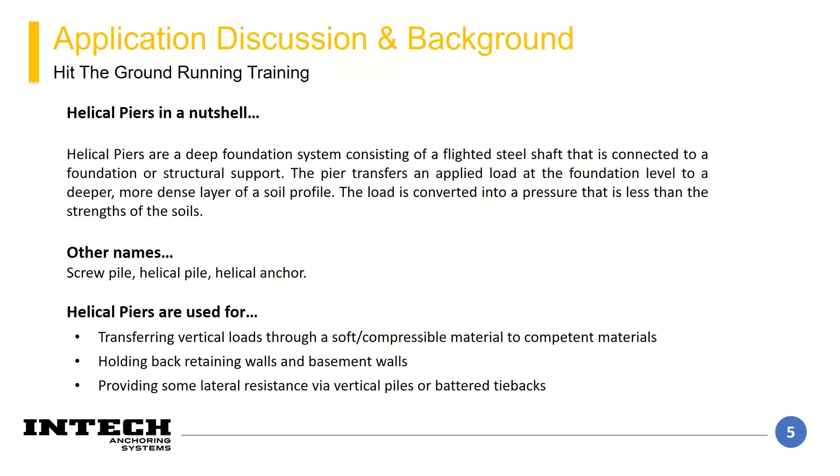You can do that with vertical piles. We have round shafts that have the section to resist that lateral load and flexural moment, or you can do a combination of vertical and battered tiebacks to try and create a static pile cap condition where those vertical piles won't ever really see the load because they'll never strain enough. So it's important to have an understanding of all that when you're doing the full structure design and understand how it's going to react.

So every helical pile has, at a minimum, at least one bearing plate or flight, a central shaft, and a termination. That bearing flight takes that load and transfers it into a wider area to decrease the contact pressure with the soil.

There are multiple options for a lead section, which I'll get into in a moment, but the section that has the flights - if you have more flights, you'll decrease that contact pressure even more. That's the balancing point we're trying to achieve for geotechnical capacity: distribute that load wide enough that the soils at that point won't fail in a geotechnical bearing capacity failure.

That plate area also has an effect on the installation torque. The more plates you have, the more it's going to drag on the soils and the more torque you're going to generate. So there's also a balancing point of being able to twist everything through the soils.

Then there's the central shaft. We have multiple shaft options, and you usually choose those based on your load and soil conditions. That shaft option transfers the loads axially into the plates at depth, and it also needs to be sized to resist the torque during installation. I'll get into that a little more in the design phase.

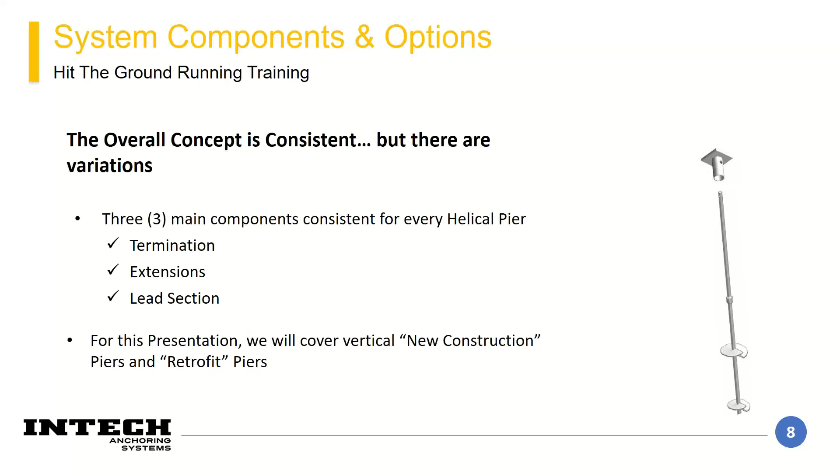So similar as before, there are three main things we call out for every helical pier: we call out the termination, we call out the extensions, and we call out the lead section. I'm going to cover both new construction and retrofit in this presentation.

Broken out here, you can see the termination is at the top. This one shows a new construction cap, which is just a tube with the plate welded on top. It should be sized such that it can withstand the load transfer from the pile cap into the shaft without buckling failures near the top, and also have enough flexural rigidity and area to not overstress the pile cap.

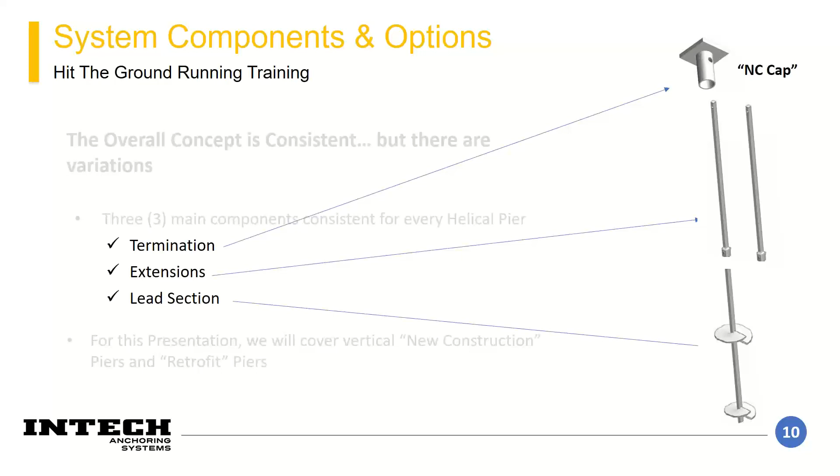The extension sections are just unflighted portions of the bar. Usually these are 3 foot, 5 foot, or 7 foot sections, and they're used to extend your pile deeper as you install, since it's a top-down installation method. The bottom represents the lead section, which is the bar section that has the flights on it, and they come in different flavors as well.

At the top, this is a typical retrofit bracket or underpinning bracket that you could connect to an existing structure. I'll get into the installation and what that really entails, but basically you're installing this up to the wall of an existing building. You try to get this bracket as close to the load as you can to reduce the amount of eccentricity.

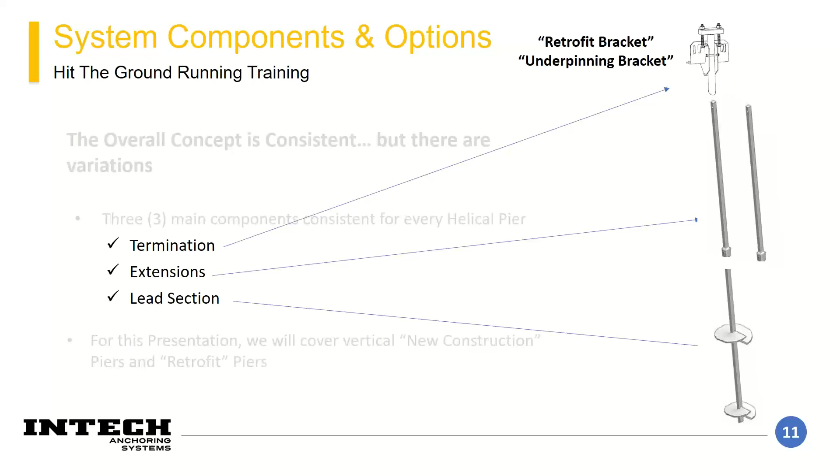A lot of times we'll see people initially have their spread footing, and they'll try to put this underpinning bracket on the extent of the edge of that spread footing. But depending on the rigidity of that spread footing, it might not be able to span the load from this column out to the edge of the spread footing. So typically what we recommend is break the footing up to where the load is and try to get this underpinning bracket as close to the load as possible.

So I'm going to go into the lead sections in more detail now. The lead section is the first flighted section of the pier. This is the section that you start installing with. Lead sections are named for their flighted configuration.

There will be a bar name, and then it'll be some type of 3 number, 2 number, even 4 or 5 number designation. What that designation indicates is the diameter size of the plates on the lead section. So if somebody says an 8-10-12, that means there's an 8-inch plate followed by a 10-inch plate followed by a 12-inch plate.

And those plates are spaced such that the stress bulbs implied by those plates won't overlap each other. So you don't have to worry about multiple modes of potential failure between the two, because those bulbs are going to be at most 2B below the plates.

We have common lead sections, and then we have lead sections that are maybe a little less common. So it can be important, if you have a project where you're going to specify or design something, to check with Bill or whomever you're interacting with on a project to just ask if this lead section is a common one. Because sometimes in the product catalogs there are things that are uncommon, people don't buy them, and there are long lead times. That's one of the places where we can help - establishing a lead section that makes sense on a project early on so there are no hiccups come installation time. That's a benefit we can provide.

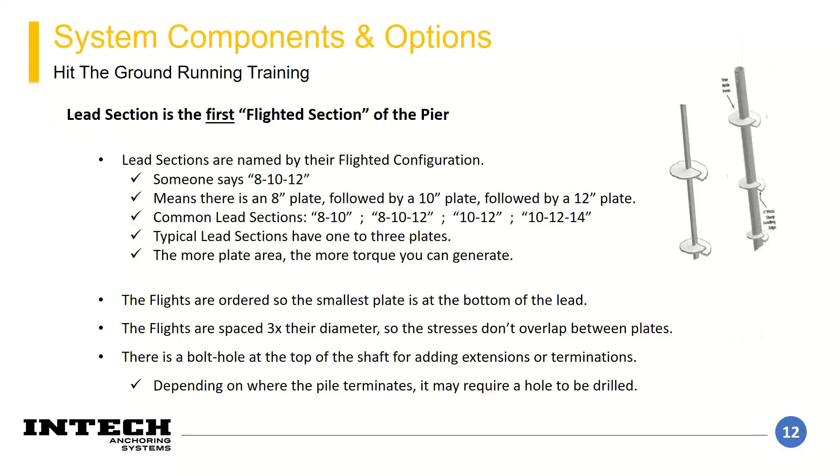We typically have 3 to 4 foot section extensions that have 1 to 2 14-inch diameter plates. You typically want about 5 or 6 at the max for the total flights you add to a vertical pier. So you might start out with an 8, 10, 12, and then have a 14, 14 on your pile. So your full pile length will have 8, 10, 12, 14, 14. That increase in area decreases your contact pressure and allows you to be in a softer soil than you originally planned for.

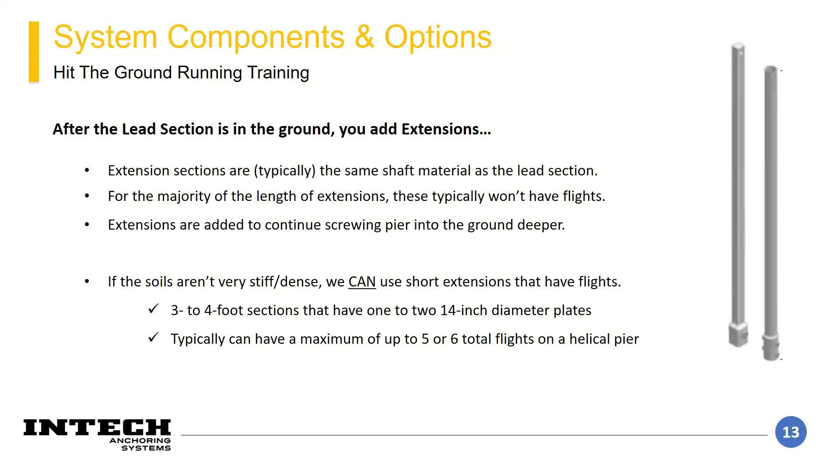So after the lead section is in the ground, we added extensions. Like I said before, typical extensions as well as lead sections are 3 foot, 5 foot, 7 foot, or even 10 foot long. You can get longer extensions, and they're more efficient to install most of the time, but they can get really heavy, and at a certain point you won't be able to handle them by hand, and you'd have to rent or have some sort of material handling equipment. So there's some balancing point between using more smaller piles versus fewer larger piles.

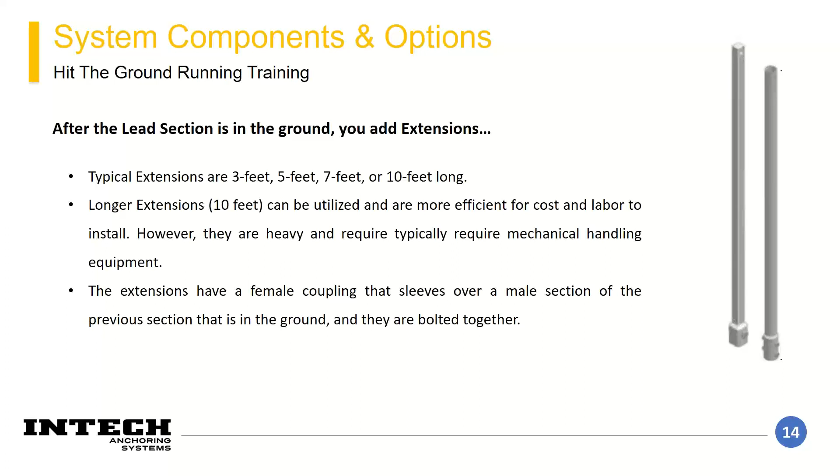The extensions have a female coupling that sleeves over the male section of the lead section or the previous extension section that's in the ground. So basically, screw the pile all the way into the ground, and you've got a little male end sticking up out of the ground. You take your next extension and put the female end onto the male end, bolt them together, and continue screwing your pile into the ground. I think it'll make sense once we get to the visual demonstration of the installation.

So, new construction termination, I went into it a little bit before. The plates are just plates with a welded pipe sleeve that go on the last extension, cut off at the right height. So you just cut off your pile and sleeve this on, and if there's an uplift or tension portion of the pile, you put a bolt through the hole, and that bolt goes through the shaft of the pile.

They're sized based on the flexural strength required for the loads and the pile cap so that it doesn't overstress the pile cap. Once the pile has achieved enough torque depth, these are placed on top of the remaining pile shaft and bolted in, and then everything gets entombed in the concrete of the pile cap.

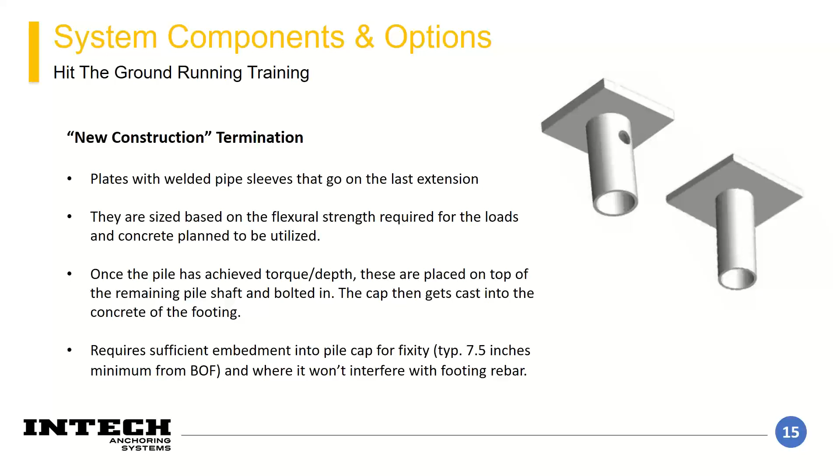One of the things that can come up is how much embedment do you need? Chance typically states that they want sufficient embedment for fixity, and that is typically 7.5 inches minimum from the bottom of footing, as stated in the design manual. If it needs to be less than that, we can design it as a pinned condition, and it'll reduce some of the capacities stated in the manual, but we can definitely help out with that.

So then retrofit termination, this is just one of two of the styles that are offered. We have a few others, and basically this termination is trying to marry up the pile system with an existing structure. Like I alluded to before, the foundation gets chipped away up to the stem wall or up to the column, and that L-shaped seat goes under the stem wall of the footing to reduce eccentricity.

And then there's a slight amount of, quote unquote, lifting pressure to engage the pile with the soils at depth. It's not really a lifting — for the majority of piles, you're not lifting, you're just lifting enough to create enough strain to engage the loads.

There are different styles, as I said in the design manual, that are more beneficial to use in certain scenarios than others. If you have a specific project need, we can help you with that.

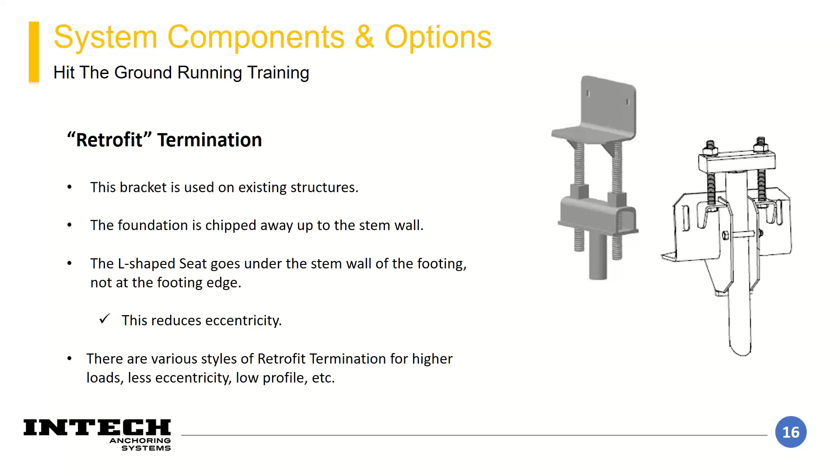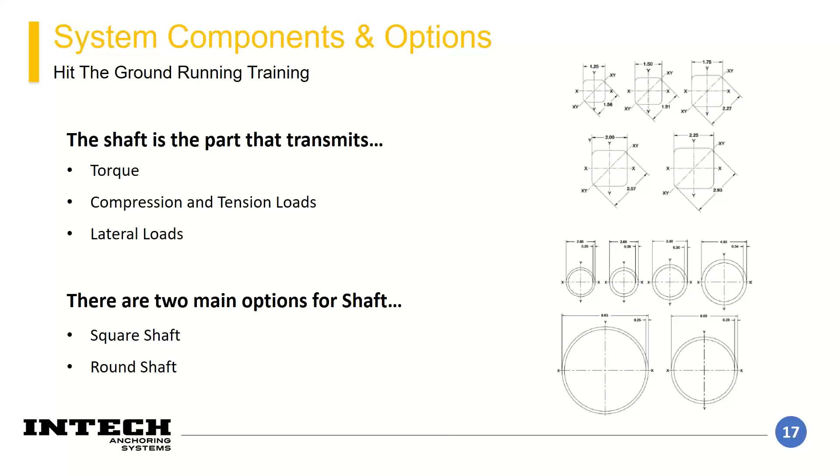The shaft is the part that transmits both the torque and the loads throughout the design life of the project. We have basically two main options for shaft: the square shaft and the round shaft. The square shaft is probably our most common and most efficient pile per load.

It is great for transmitting loads through stiff to medium dense materials, and it has great penetration. Sometimes though, you have to worry about things like lateral loads, or having a relatively thick layer of softer soils can create a buckling concern, as defined in the chance manual, with blow counts less than 4 for over 5 feet generally as a rule of thumb.

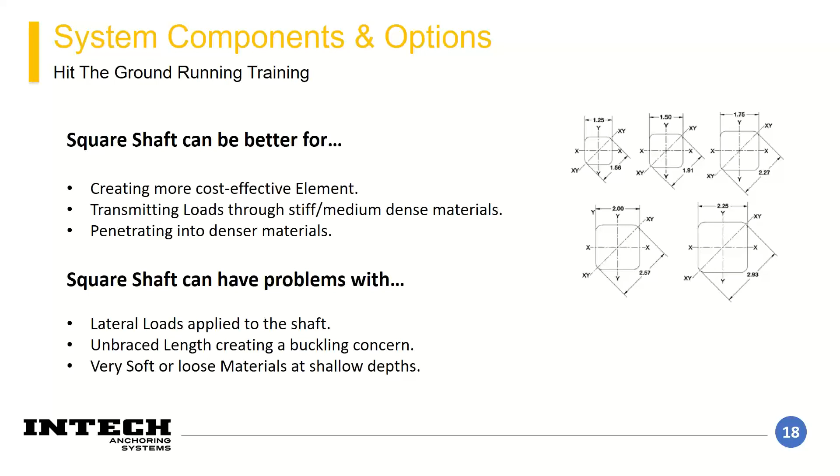When you have these scenarios, you might have to switch to an alternative. But if you don't, square shaft should typically be your first choice as the most efficient type of pile. The naming convention for square shaft breaks down as a 2-letter designation, SS for square shaft, followed by 1 to 3 numbers representing the square dimension.

The weird one is SS5 versus SS150. Both are 1.5 inches by 1.5 inches. The only difference is it's a different grade of steel for the SS150, so it's able to handle a bit more torque and a bit more vertical load. The SS5 is a little weaker and the SS150 is a little stronger.

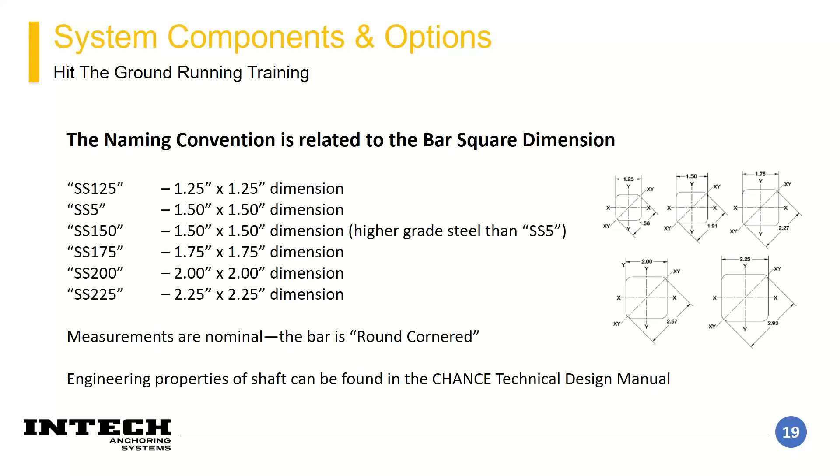All of the ratings are here, so you have your torque ratings as well as your uplift and compression capacity limits on the right side. Those are the ultimate capacities of the bar. I'll get into the torque rating calculations in a bit, but basically all of these have a K sub T of 10.

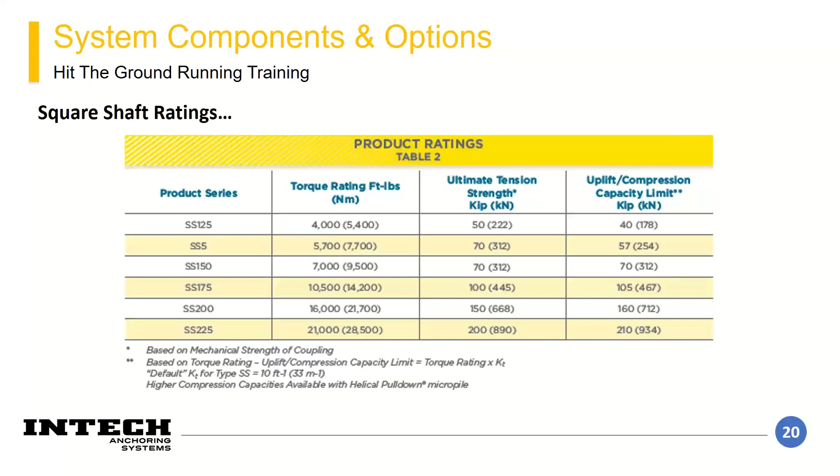Our second flavor is round shaft, and this is the shaft you would choose if you had lateral loads or an unbraced length concern. Round shaft is a little less efficient with its torque to capacity ratios and has a little more trouble penetrating into denser materials.

It definitely becomes heavier, especially as you go up to larger pile sizes and larger lengths. But I'll talk about how we can mitigate some of these concerns with our special pile configurations.

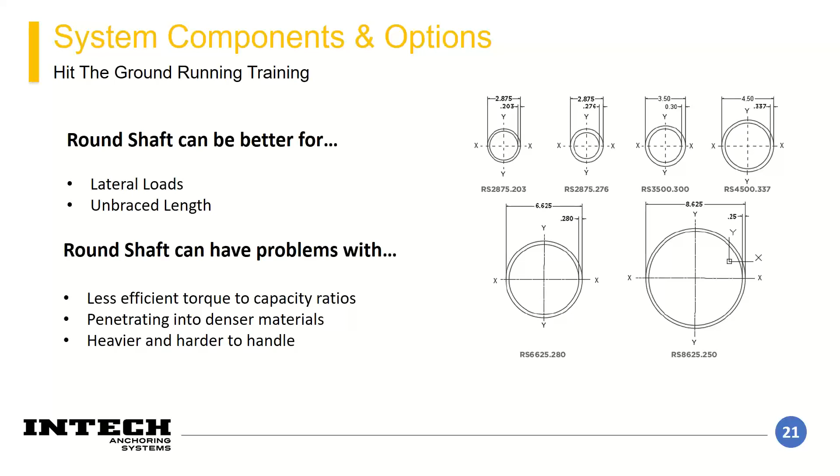The naming convention for these is the first 2 letters, RS for round shaft, then the next 4 numbers is the outside diameter in inches. So 2875 is an outside diameter shaft of 2.875 inches. Then there's a period followed by another 3 numbers, which are the wall thickness.

So the first line is a 2875 with a 0.203 inch wall thickness. The more wall thickness you have, the more it'll resist.

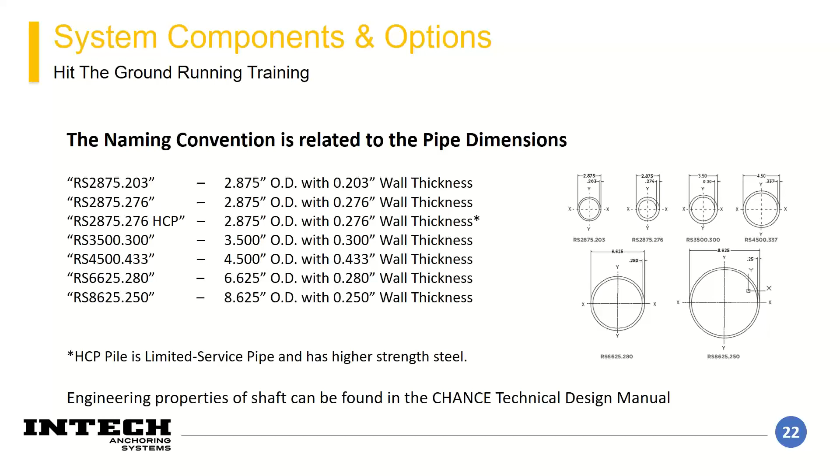We also have a high capacity pile, limited service pipe, which has a higher steel strength and is able to achieve quite a bit more torque. It can be a better alternative than the 3.5 inch material for similar engineering properties at a cheaper price.

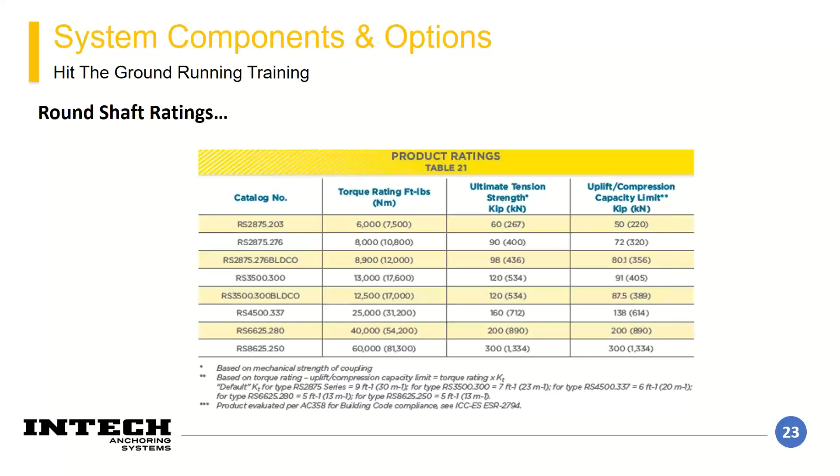This table is similar to the square shaft table. It has the torque ratings and ultimate compression capacity limits for each of the pile shafts, and you would marry that up with your design loads with a factor of safety of 2. One difference between square shaft and round shaft is it has a different, variable torque to capacity ratio depending on the diameter. I'll get into that in a bit as well.

We also have some special configurations and components. This is a list of the main ones we encounter: a helical pull down, which is basically a grouted helical; a combo round shaft/square shaft pier that we have an adapter for; Drivecast displacement piles, a large grout diameter displacement pile option we offer; Rock-IT lead sections, a special type of lead section with carbide cutters and other features I'll talk about; and walkway brackets.

So pull down, helical micropile, grouted helical—it's all the same thing. Basically, it is the same helical pile, you just pull down a grout column with it.

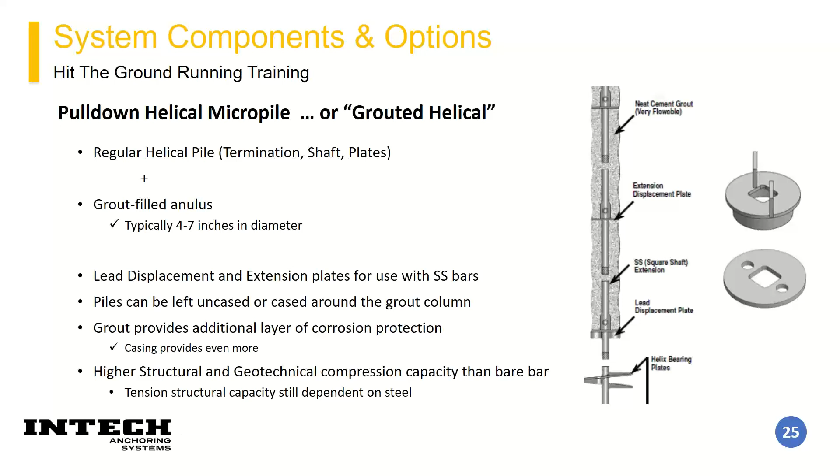That grout column allows you to develop skin friction along with end bearing in your lead flights. You're able to achieve higher structural capacities and geotechnical capacities than just the bare bar itself. We also have options for pulling down casing with the grout column to resist flexural moments near the upper depths of the pile. This is a very common solution when we don't have stiff enough soils for end bearing in our flights. We can pick up quite a bit of skin friction with these. One thing to note is tension structural capacity is still going to be limited by your steel.

The second special pile configuration we have is the combo round shaft square shaft. Basically, if you took the advantages of square shaft and married it with the advantages of round shaft, that's what this pile is doing. You're able to tackle that lateral load or buckling concern in the upper depths, and then transition to square shaft, which is just a more cost-effective pile in itself. The bolt goes through both shafts in the coupler, so you can also transfer uplift through this.

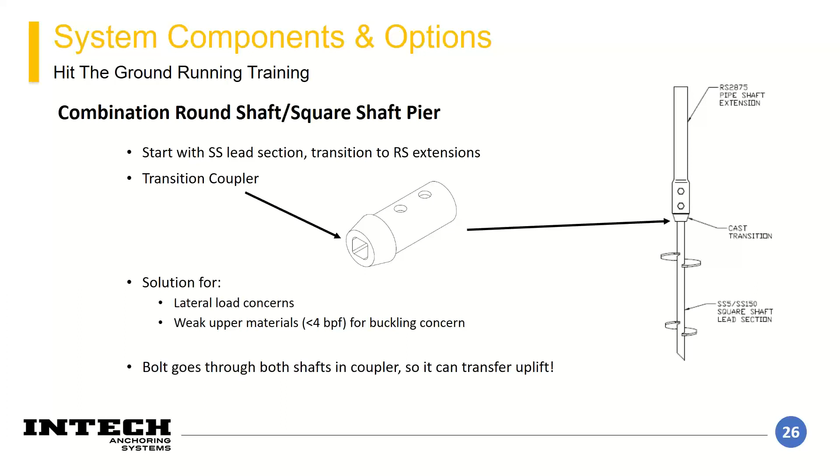Drivecast is our displacement pile option. This is a large diameter pile, between 2-7/8 and up to about 6-inch pipe shaft, with up to an 8 to 14-inch diameter grout column displaced. This pile goes into the ground, creating a large diameter grout column, and the steel of the helical becomes the reinforcing for the pile itself. It's a one-pass installation -- you get down to the bottom and you're done. Then you put a pile cap on top, and it gets entombed in the pile cap as well.

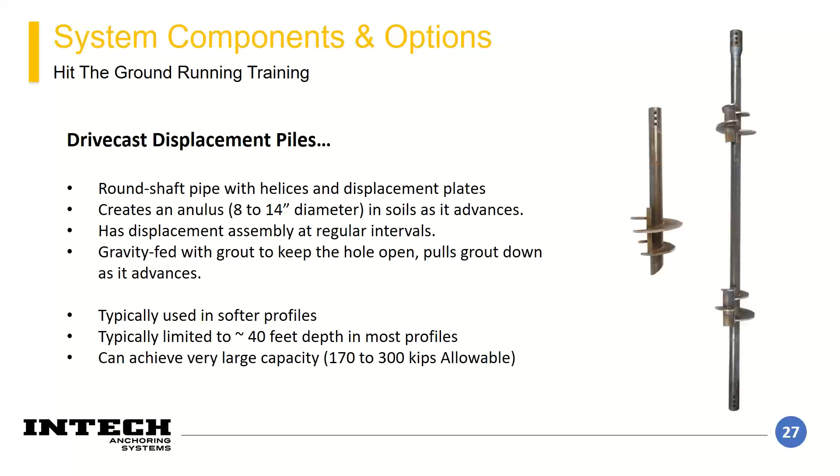This is typically used in softer profiles because you're gaining that skin friction with depth, and it typically limits you to about 40 feet depth -- they just start to torque up at that point. But you can achieve different lengths if you do a little pre-drilling, if necessary, and can achieve very large capacities, 170 to 300 kips of allowable load, depending on your soils.

Another option we have is the Rock-IT lead section. This is a lead section that has a carbide tip cutter on the very tip. It's got thicker helical flight sections with heavier welding, and this can be used in shales, cobbles, and gravels when you have lenses you have to penetrate through and don't want to worry about torquing up or chattering. Basically, it helps penetrate through those materials a lot more easily.

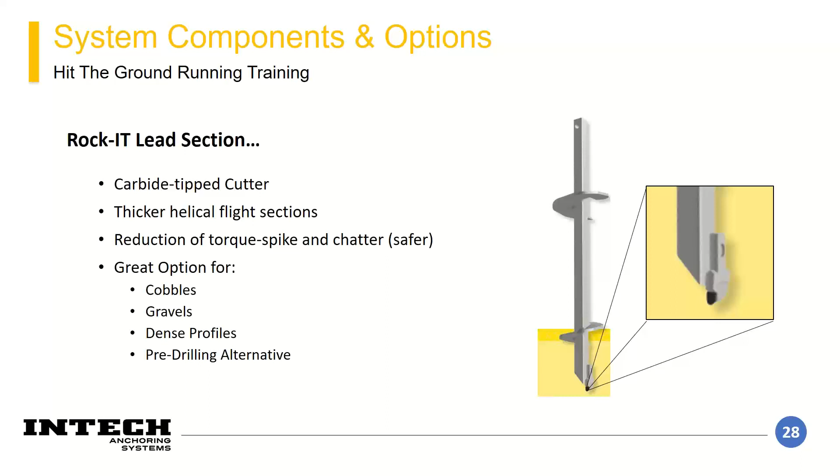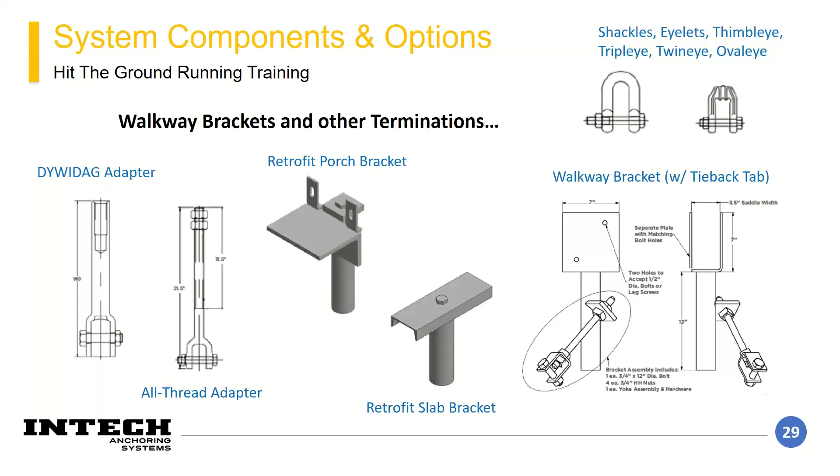Then we have walkway brackets and other terminations. On the left, we have an all-thread adapter, so you could transition this into some sort of a plate that you can put at any elevation or something of that nature. We have a retrofit porch bracket, a slab bracket, and a walkway bracket on the bottom right for grabbing onto the beams at the bottom of the walkway. Up at the top right, we have shackles, eyelets, thimble eyes, triple eyes -- basically getting cable connection to our piles.

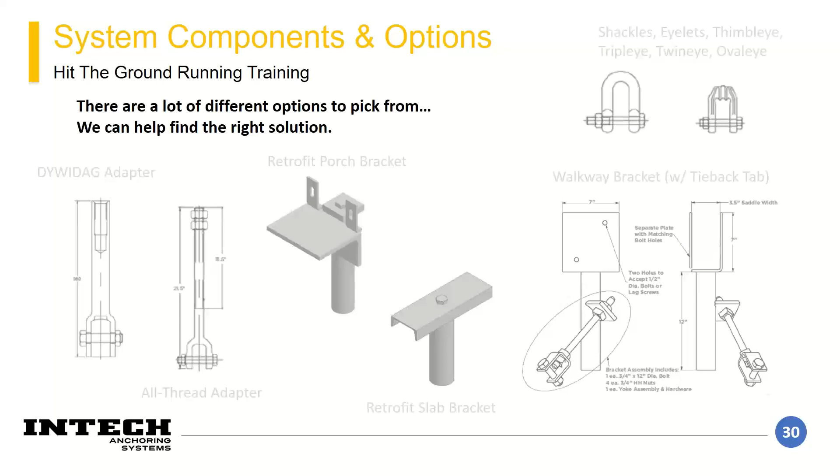If you have questions on that, or if you're looking through the product catalog and have a specific need for a project, Sam and I have multiple years of experience, but we also have access to Chance's engineering staff who have 30-plus years of experience across a number of people. So if you have a specific project, termination need, or really anything, we have quite a bit of a clout in the industry. Do you have any questions on any of that at this point?

I don't think so. Good. Hopefully that means I'm doing a good job. We'll get there. Yep.

All right, so now I'm going to go through the system installation, and before I get into the actual installation, I'm going to talk about the different methods of installation. The first type is hand installation. This is usually used in basements or hard to access areas, and it basically consists of a drive head with a torque bar that has a spider valve or a pressure valve that feeds pressure from an external hydraulic power unit that has hoses connecting everything together. Basically, you can take that, hose it in somewhere hard to access, and torque your helical in a hard to access area.

So we currently carry two options: a 2.5 kip foot drive head with an 8-foot aluminum torque bar, and then we also have access to a 5 kip foot drive head, and the torque bar for that needs to be fabricated by an external vendor. I don't know, Bill, if you have any other hand installation options at this point, but I think we have access to a number of vendors and we might be able to.

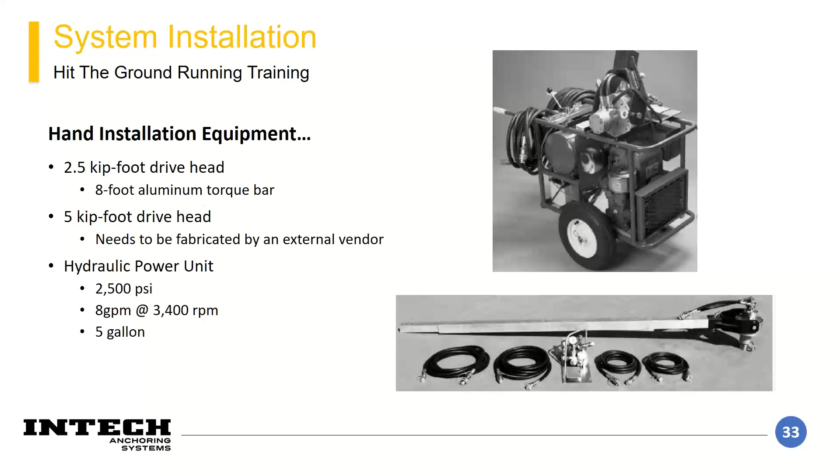If you have a specific need, but if the contractor has a specific need, we can help them out with that.

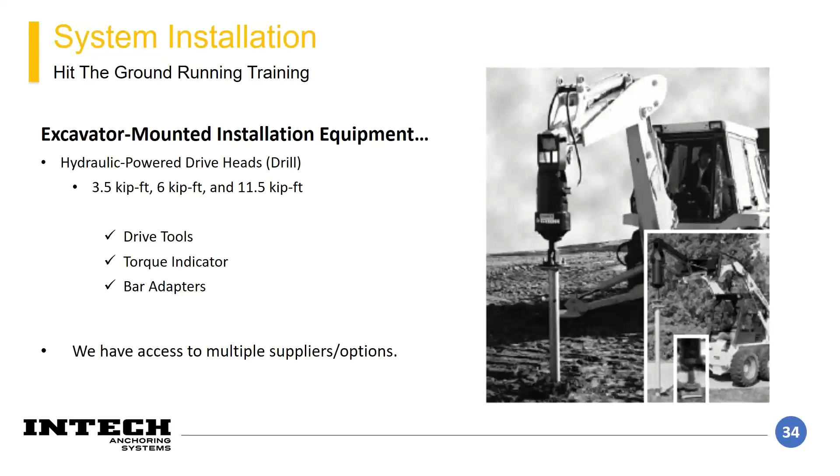So then for the second style of installation is an excavator mounted installation equipment, and basically the drive head gets mounted onto the arm of the excavator, or some sort of equipment that has hydraulic power, or you can still run this off of an external power pack as well. And basically this consists of the drive tools, a torque indicator, and bar adapters. Bill can attest to any other flavors or options that we have, but I don't think we need to know that for now.

So the general drill setup, the drill string for the excavator mounted setup is the excavator's at the top, and it gets pinned into the drive head in some way. There could be some sort of adapter that goes between the excavator to mount to the drive head, and there's multiple configurations of that, but for now I'll skip that.

So you have your drive head. Your drive head comes out as a Kelly bar. So you have a Kelly bar adapter that has a bolt circle that mounts to a torque monitor, and then that torque monitor has female bolt holes that you can put a drive tool onto.

So basically that drive head is the drill, and it's applying the rotary torque to everything. It requires pressure and flow from an external source of some sort, and you have to have sufficient pressure and flow to run the drive head to the torque that it's rated for. Otherwise, you lose power. Then that Kelly bar adapter is just transforming it into that bolt hole pattern.

And then the torque monitor is basically an inline measurement of the torque through the system. There are other methods of measuring your torque, which is the most important thing to measure while you're installing these piles. But we prefer this digital torque monitor because it's calibrated, it's internal to the string, and they've shown that they provide a much more accurate representation of the torque through the system while you're installing. So we recommend this style.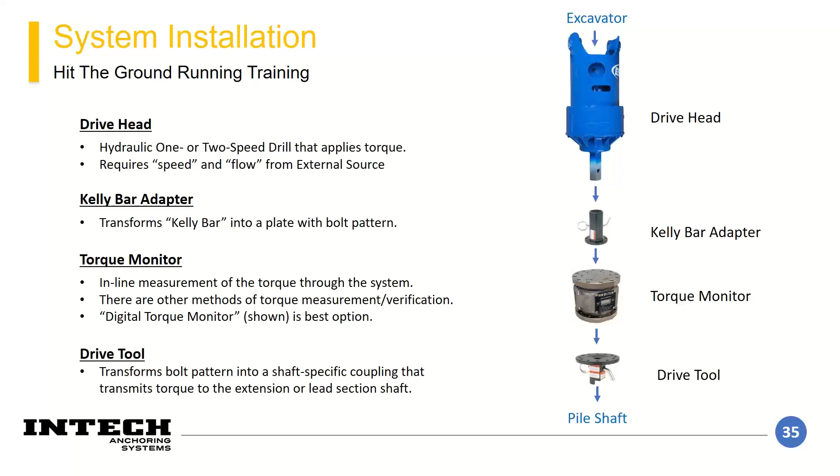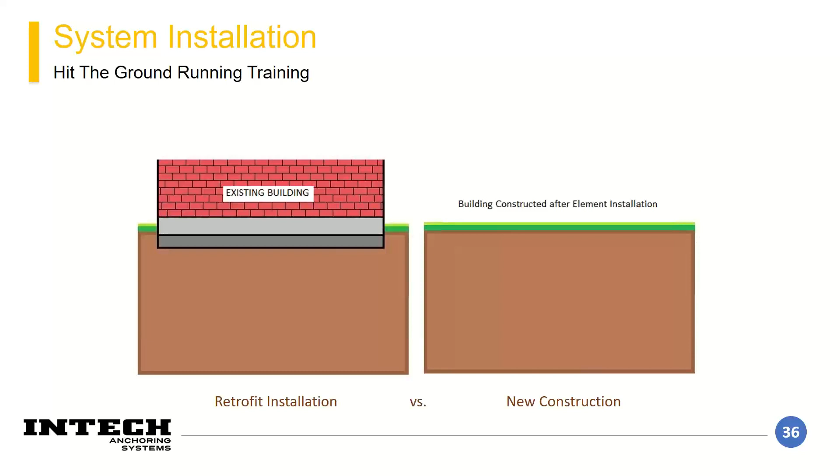Okay, so now I'm going to go through a number of slides that represent the installation procedure for a retrofit, and then I'm going to go through the procedure for a new construction, which is mostly the same. But so with an existing structure, for this case, we're going to consider a building.

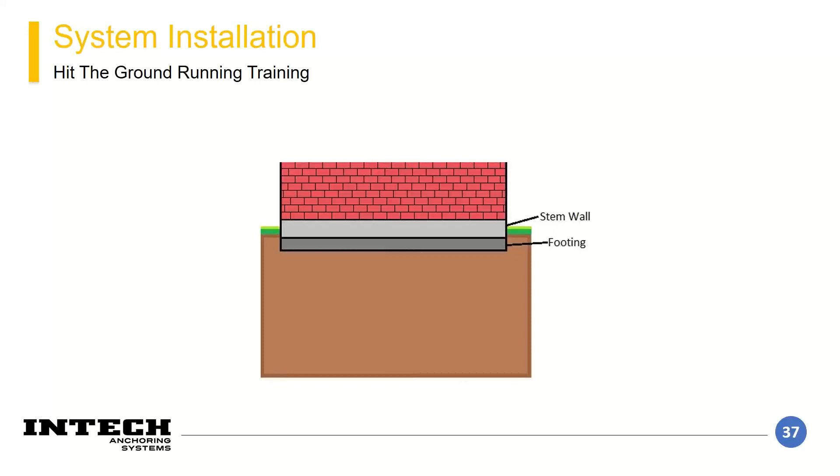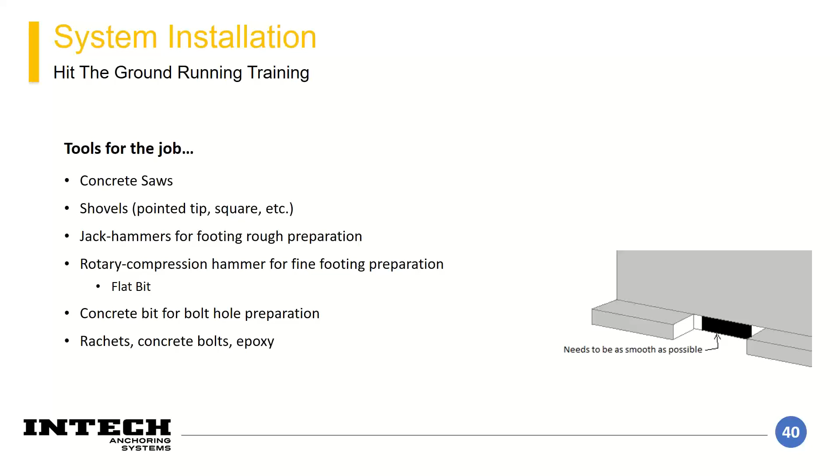You'd start with your stem wall, you'd start with your footing, and you're going to excavate down and partially demolish the footing up to the stem wall just to get closer to the load. And it's really important that this face is very smooth and angled at a 90-degree angle under the building so that we can have the most contact with the retrofit bracket with the structure. It's important to have the right tools for the job and making sure that you're making it the most smooth and the most neat that you can make it.

So once we have all that excavated and partially demolished, you bring your lead section up into the hole and you kind of angle it back to be able to get the flight sections under the footing, and you connect your drill string to the lead section and you apply crowd and torque to advance the lead section most of the way into the ground.

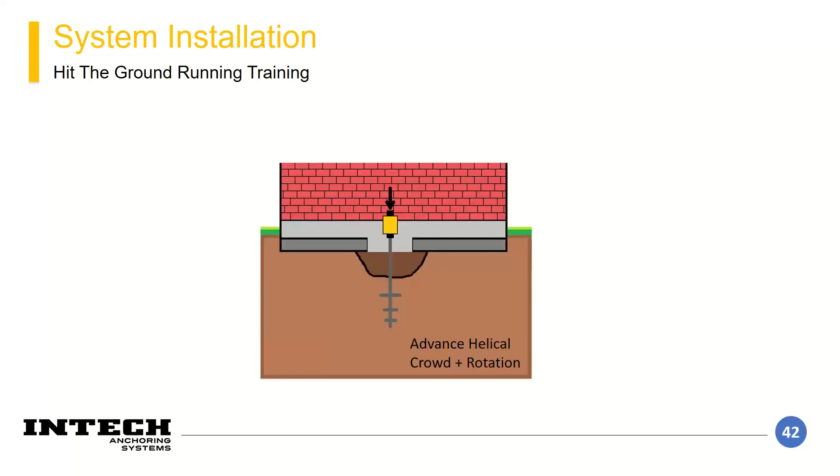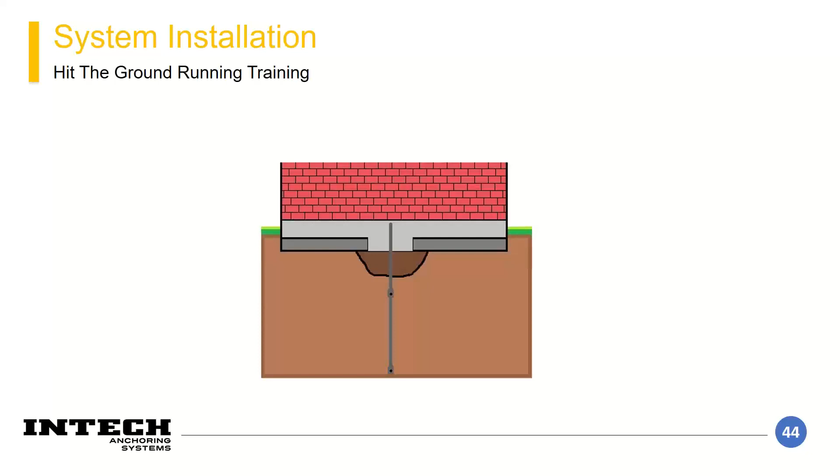When it's most of the way into the ground, you disconnect the drill string from the lead section, add an extension, and reconnect your drill string to that extension, then do the same thing again. You keep doing that, monitoring torque until you reach the depth or torque required for the project. Once you've achieved that torque, you're able to terminate your pile, and the first step is cutting off extra shaft.

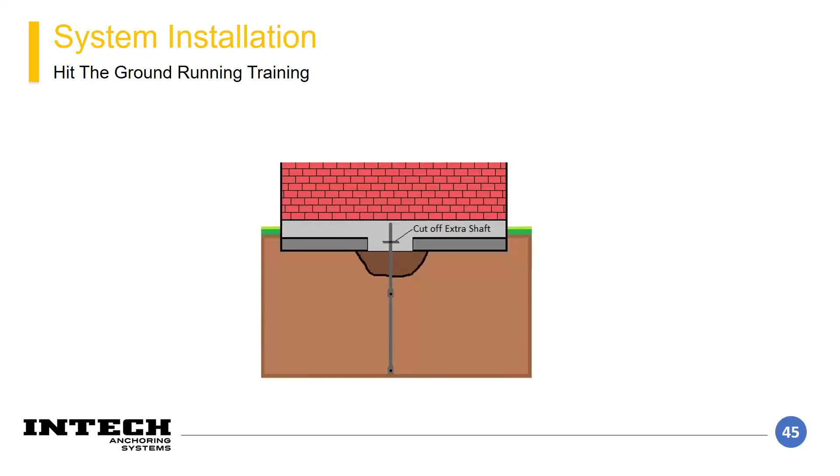Then you add your lifting setup, which is the retrofit bracket, a lifting ram, and a lifting bracket. Basically you are pushing down on the pile while lifting up the building. While everything is engaged, there are set nuts that you screw down, which reduces the length that you set the pile back down on. So you're lifting the structure and locking that off, typically just enough to engage the structure.

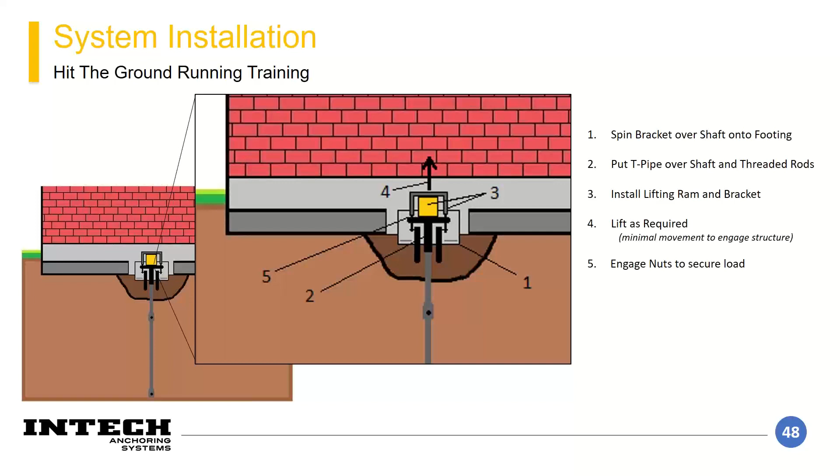Once you're at that point, your element is installed and finished, and then you can put your backfill back around it.

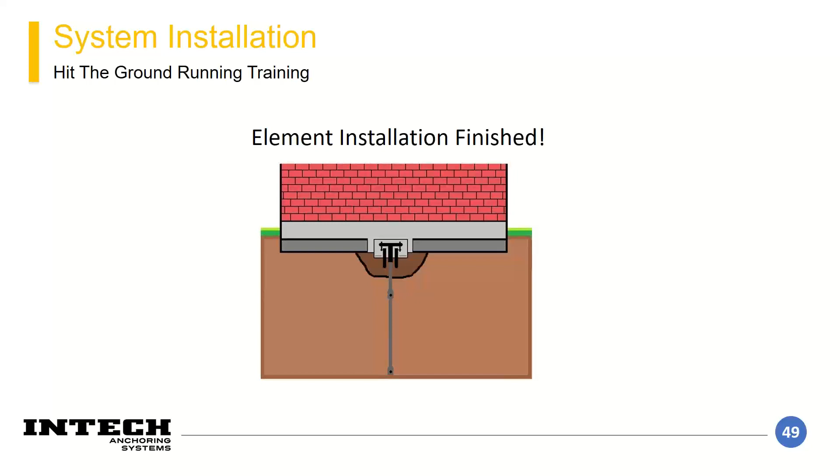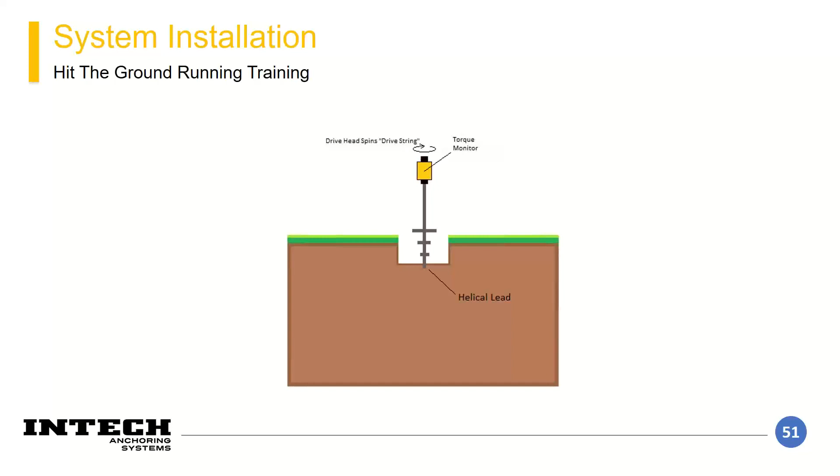For new construction, it's pretty much the same thing. You put your lead section with your drive string into the hole, apply crowd and torque, disconnect everything, add an extension, and do that again, advancing it with crowd and torque.

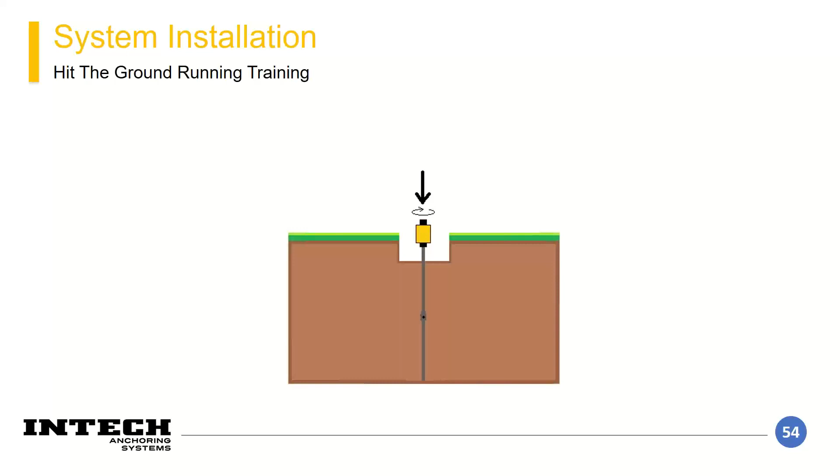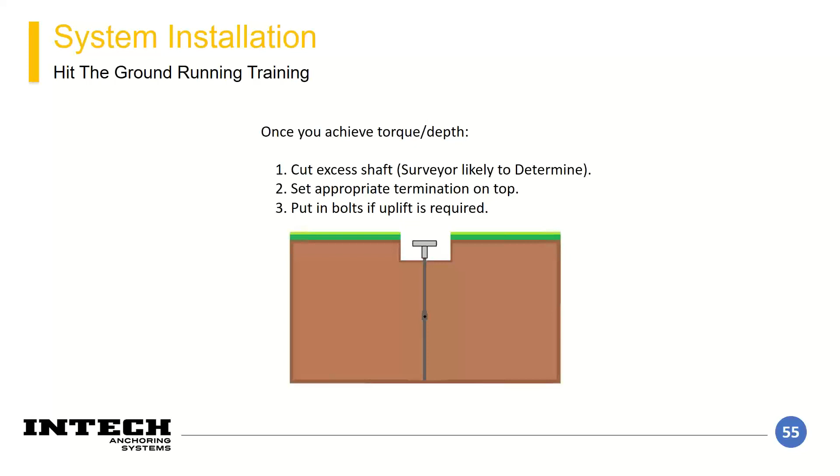Once you get to the torque that allows you to terminate your pile, you cut off excess shaft—probably determined by the surveyor to be at the right level for the pile cap. You set your appropriate termination on top, putting in bolts if uplift is required, and then everything gets cast into the footing for the building or pile cap for your structure.

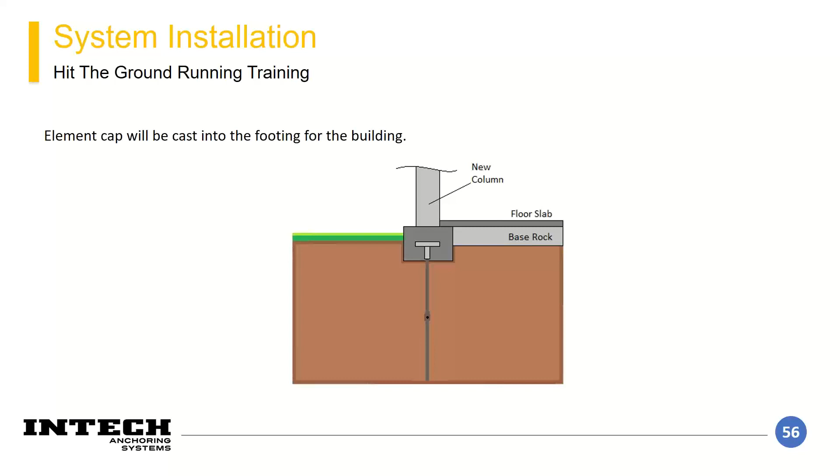Some of the main talking points for helicals: it's really important to screw these into the ground instead of drilling, so you don't want a lot of material coming up out of the hole. If you're displacing the materials out of the hole, that's creating a void, and the pile won't be secure. That's really important.

Coinciding with that, you've got to have enough crowd to push down on the pile while advancing it, because if you don't have enough, you won't get enough penetration into the soils and will start to drill the material out. It's important to have maybe a come-along if you're doing a hand install, ratcheting it down while spinning to really engage it with the soil. Or if you're doing an excavator-mounted setup, maybe it's necessary to have heavier equipment to give it enough crowd to push down on the pile enough.

The rate of spinning should be one helix pitch, like 6 inches of penetration per revolution. If you're sitting in the same spot and turning, that's spin out—that's going to constantly displace the soils above the helicals, creating a bad condition for the pile to transfer loads.

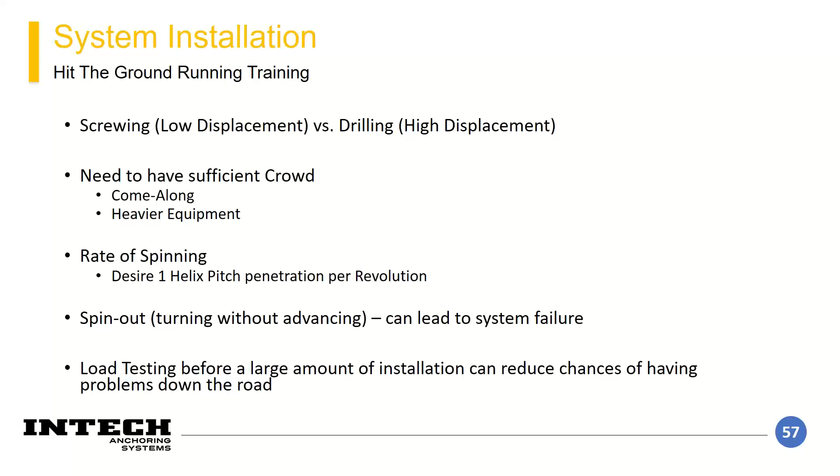One of the more common special scenario piles we come across is the grouted helical, so I'm also going to go through a quick demonstration of its installation. Basically, like I said before, a grouted helical is the same thing as a regular helical—it's got shaft, plates, and a termination. The only difference is you're going to pour down a grout column by gravity as you advance the pile.

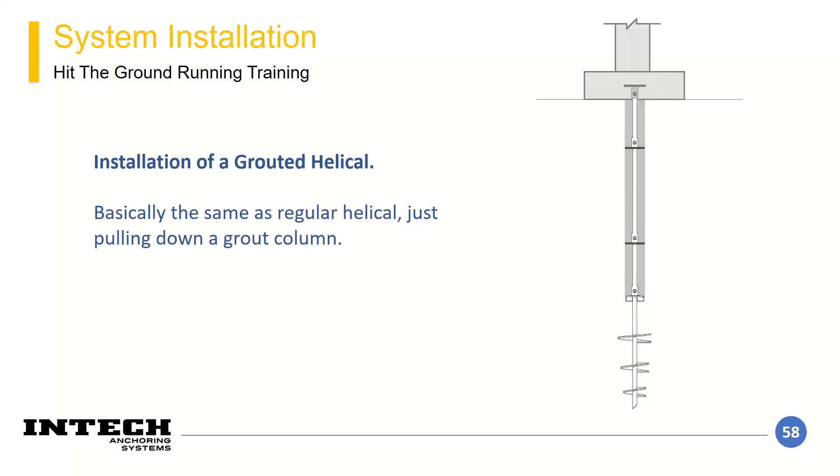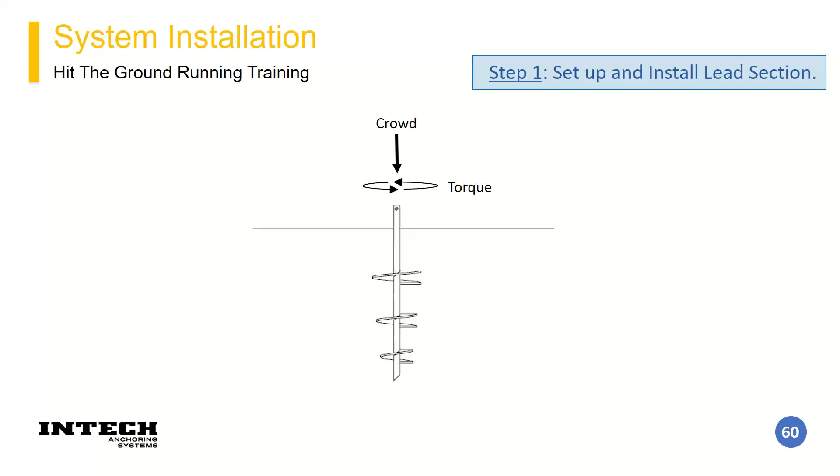So you would start with your lead section like normal, and you'd spin that into the ground with a little bit of shaft remaining above the ground. Then you're going to add a reservoir. You're going to add what's called a lead displacement plate, which is a plate that has paddles on it, and that's going to be on your lead section.

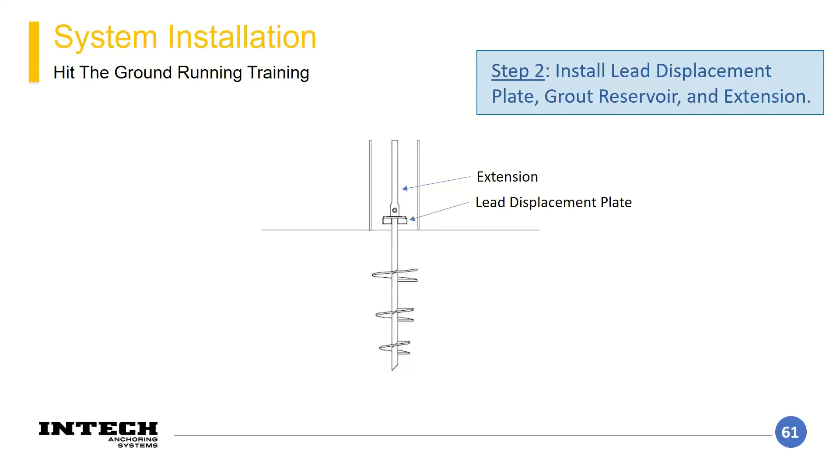Then you'll add your extension section above that, and then you have your grout reservoir, like I said. You probably need to bury that a little bit so that grout doesn't run out the bottom. So basically, while you are applying crowd and torque, that lead plate, displacement plate, is creating an annulus in the soil that is going to be gravity fed with grout, and the cuttings will be floating up out of the grout as well.

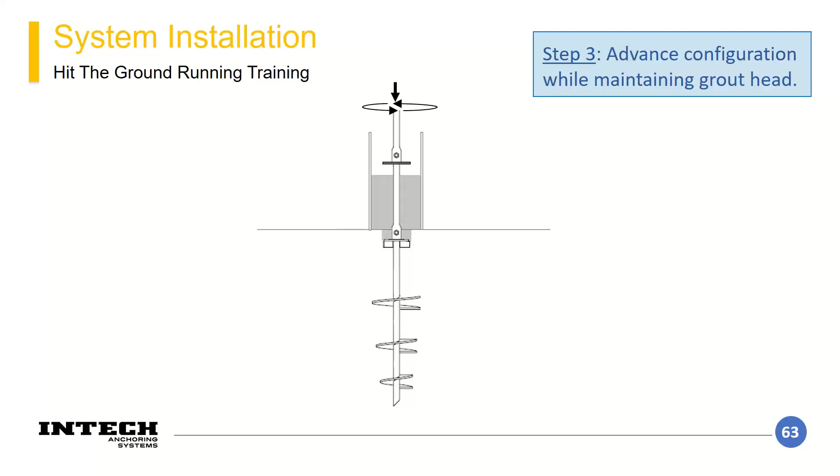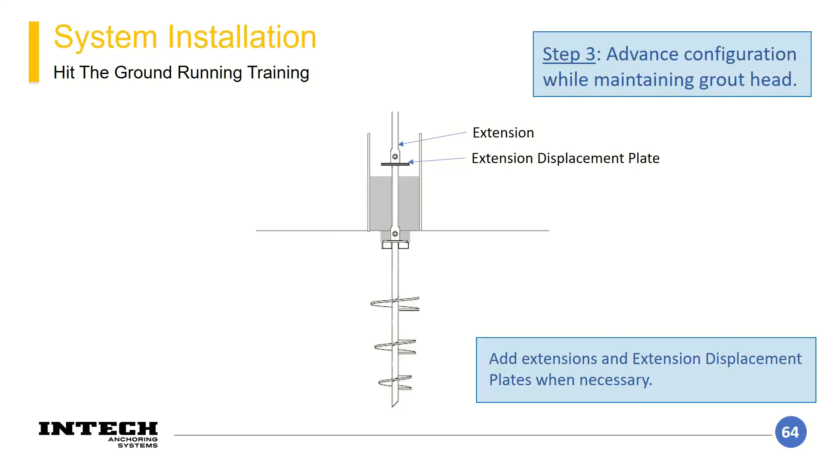And you're just keeping that filled the entire time while you advance the pile. So we also have extensions that we'll add, and we have extension displacement plates that kind of make sure that the hole stays open, and it has holes in the extension plate so that grout can flow through and connect between the two.

It's just important to keep advancing, apply crowd and torque, keep filling that grout bath up so that the grout keeps pulling down with the annulus being created.

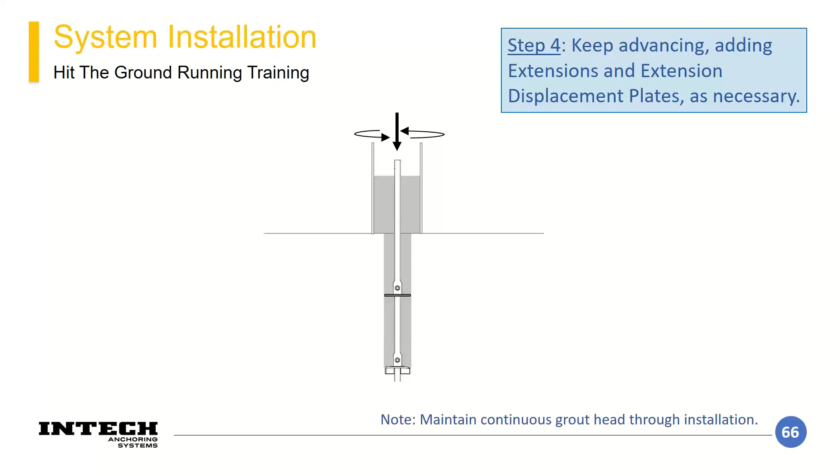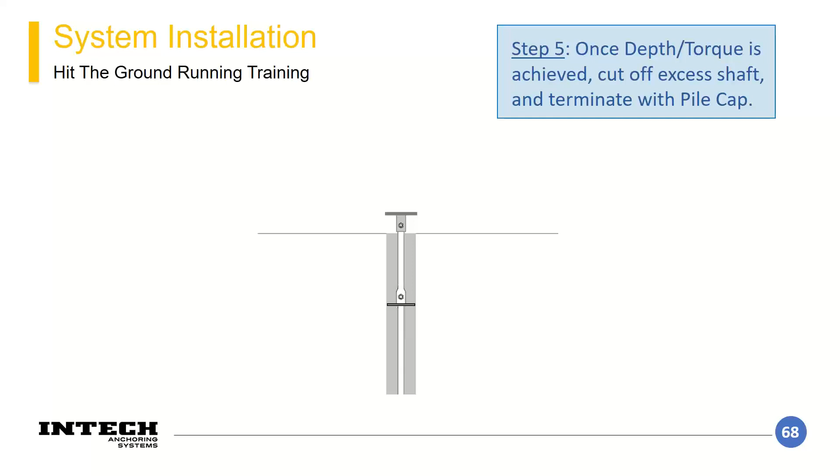And then once you get to this one's a little special. So you get to a torque as well as a length that you initially designed for, and then you can terminate it. Once you get to that point, you cut off your pile at the level it needs to be cut off at, put on your pile cap termination, and then everything gets cast into the footing.

So, like I said before, it's all the same components with your lead sections, extensions, and termination. You're just adding a lead displacement plate and an extension displacement plate.

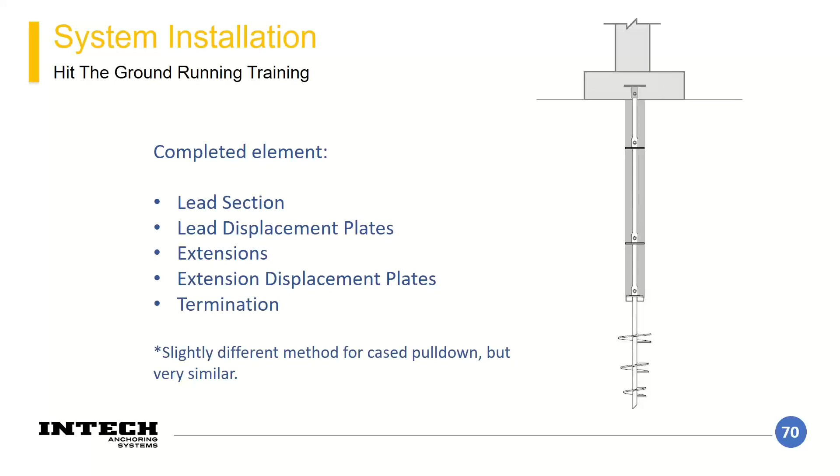So what's it cased with? You just advance it with casing that is like ASTM A53 or A500 pipe. Steel pipe though. Yeah, steel pipe. Is that usually galvanized? I think we get that galvanized, or it comes galvanized. We can help either way. Most of the time our partners are finding that.

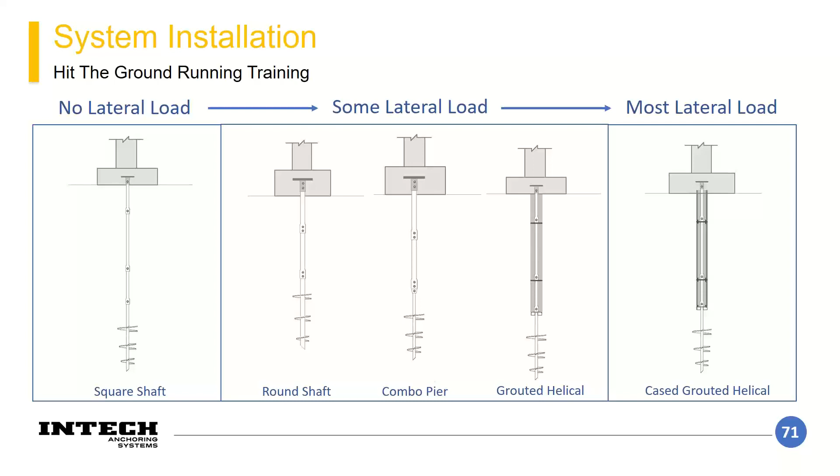So did you have any questions on the installation? I don't think so. Okay.

So then we'll go into the design. The design workflow that we see for most projects is somebody determines an estimated load per length of footing. A structural engineer is going to evaluate the existing structure, or they're taking their new structure and applying all the load combinations and figuring out, okay, this is a column load, I think I can get away with a number of piles. So they'll space point loads for our piles to resist that load that they came up with. And then if you take that load per length of footing or the column load divided by the number of piers, that's the required load per column, per pier.

And then somebody figures out, okay, geotechnically this doesn't make sense, and that spacing or quantity of piers can be revised to make it geotechnically work as well. I feel like that's a common thing we help with: somebody will look through the design manual and see the structural ratings of the piles and say, okay, we can get away with a 150 kip pile. Then they get to the geotechnical design and realize, oh, the soils are really only ever good for 70 kips, so we got to switch up the pile. That's one thing I really enjoy doing, trying to figure out what's the most efficient number of piles geotechnically that also works structurally.

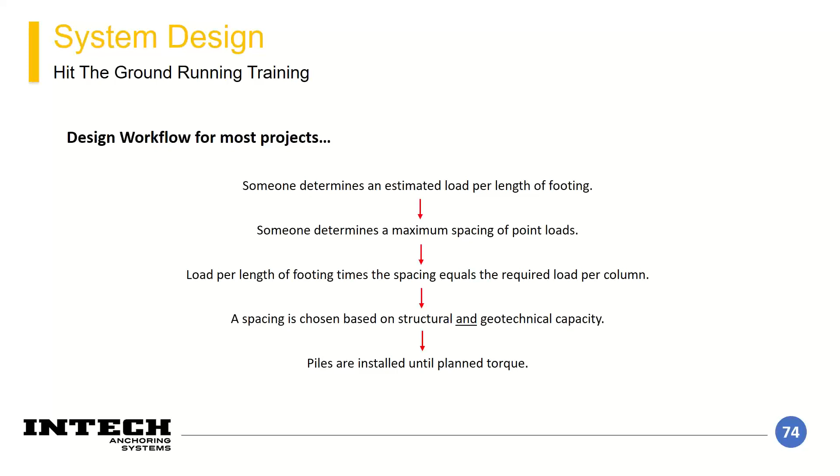And then once you have your design, you install your piles to the planned torque and depth if it's a grouted helical, and you terminate it. You can also do load tests to verify the strengths of the system, typically with the torque correlated capacity. So if you're terminating it based on torque, there's about a 95% confidence that your pile is going to perform at or greater than the capacity stated by the Kt value.

So the geotechnical strength of the system is determined by the ultimate bearing capacity of the soils at each plate. And that can be verified through load testing, like I said, or the torque correlation factor, which is an empirical relationship. I'll have that in a couple slides, I believe.

So then a maximum load per pier should be estimated based on the type of structure, but it also needs to take into account the condition of the structure, whether it's a new retrofit or old retrofit, and the spacing of the elements. So if you have relatively weak spanning flexural strength of a pile cap, like for a strip footing, you might have to space your elements closer because the pile cap or grade beam can't span the loads and lengths that are planned. And throughout installation, the torque needs to be monitored no matter what.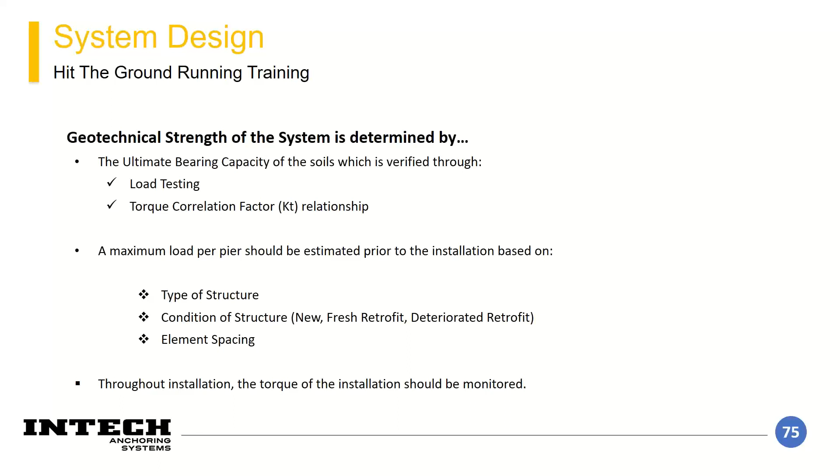So you have the Chance Technical Design Manual, and if you have any issues with that, let me know. But we also have an online software called HeliCAP, and basically HeliCAP lets you go in and put in a soil profile and try out a number of different lead sections and lengths for piles, and figure out what ultimate capacities I could use for a pile. So it helps establish a design for estimating purposes, this pile should work in this soil profile, and here's the calculation that represents it. Basically, HeliCAP goes through and calculates the bearing capacity of the plates with a number of depth iterations and comes up with, here's the point at which the pile should work.

And Chance has a number of online tutorials. I also plan at some point to create a shortened version of the tutorials to give a good rundown of the workflow of starting a project to ending it. They have a lot of parts and pieces for their tutorial, but it's pretty user friendly and intuitive to use if you've used any other software packages at all.

So then the Chance Technical Design Manual has the engineering properties for all the products that Chance carries, all the section modulus, areas, corroded areas, and stuff like that. And that's provided on a per shaft basis for the helicals as well as the resistance piers and push piers.

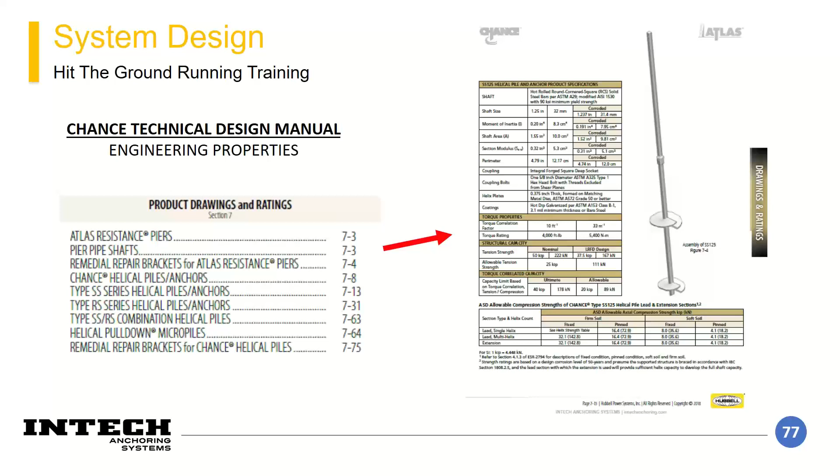And then also in the Chance manual, there are a couple sections that I think are pretty useful for engineers. Section 3 is product feasibility, so it gives you the overall idea that if I have a soil profile, I can have a good intuition that helicals are going to work because it's a soft profile, versus Atlas resistance piers, which is an end bearing element on a hard end bearing zone, so you've got to have something hard. You can have a good idea of when helicals are going to work or when they're not going to work.

Section 5 is the design methodology, and that walks through all of the geotechnical and structural principles that should be used for engineering design. Section 8 goes through a number of different design examples that are worked out, which is very useful to see all the parts and pieces that should be considered from an engineering basis. Appendix C is a basic guideline for designers, almost like a set of specifications. We also have standard specifications that can be provided and cut to be specific for the project being worked on. And I talked about the tutorials.

So now I'm going to talk about the torque correlated installation and the termination criteria for that. A lot of times that's one of the benefits of helicals: you have a pile that you're going to install and you don't necessarily need to do a load test.

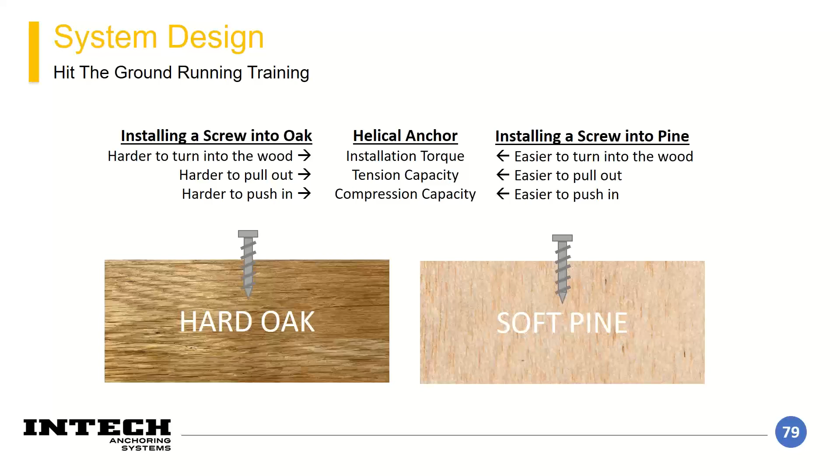And thereby, since it's harder soil, it would also probably react better to a load applied to it and transferred through the flights. So this relationship is: the pile capacity is equal to the measured torque times the K sub T value, the empirical torque correlation factor. The K sub T is a number that they've statistically decided is the ratio of torque to capacity that makes sense. For square shaft, I'll get into the why in a few slides, but the K sub T is always 10. For round shaft, it varies based on the outside diameter, and it gets less of a relationship between torque and pile capacity with the larger diameter you have.

Another important thing is this relationship is based on the measured torque, and it is possible geotechnically to have more capacity with depth by having a material below your pile that is way stronger than the material you've gone through at this point. So if it's a really dense sand that you terminate in, the pressure bulbs at the bottom of your lead section are going to engage with that denser material, and it'll allow you to have more bearing capacity.

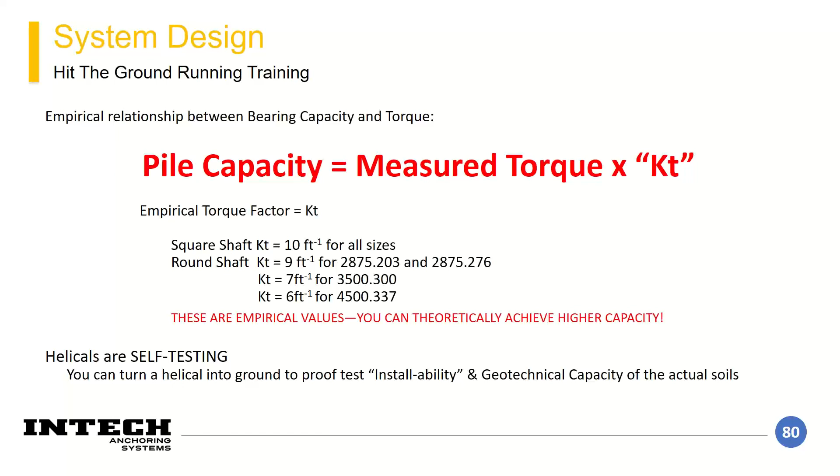And they are self-testing, is what we call it, where if you're monitoring the torque, it's typically—depending on the engineer of record—acceptable to use that torque and that torque correlation factor to allow for pile acceptance. But that would be dependent on the engineering team's level of risk aversion.

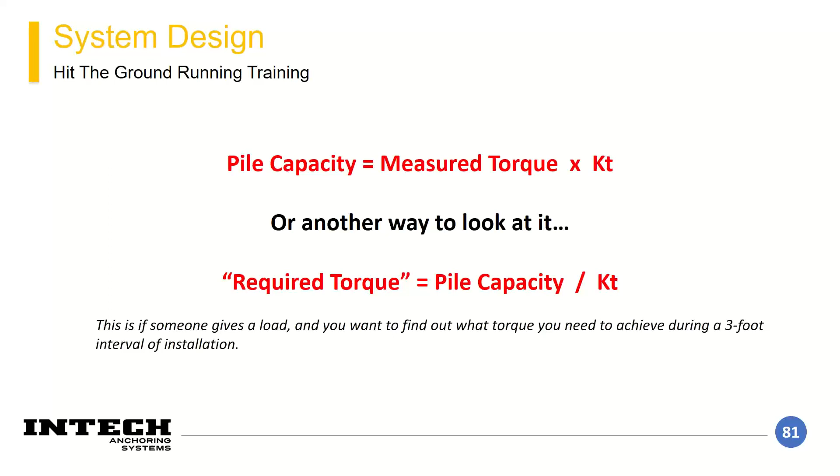Another way I like to display this equation, useful for contractors, is: what torque do I need to get to for a load? If you rearrange the equation for required torque, it equals the pile capacity over that K sub T. So somebody starts out by saying, okay, I've got a 20,000 pound pile I need—what torque do I need to achieve using an SS5? You take that 20,000 pounds of pile resistance you need and divide it by 10, so the required torque would be 2,000 foot-pounds, or 2 kip feet.

Then for the same load scenario, if we say maybe there's some lateral load, or a buckling concern up top, and we have to switch to a round shaft—say it's a 3.5 inch round shaft with the same load—what torque would I need? You basically take that same load and divide it by 7, which is the K sub T for a 3.5 inch round shaft, and that says you need a required torque of about 2,850 foot-pounds.